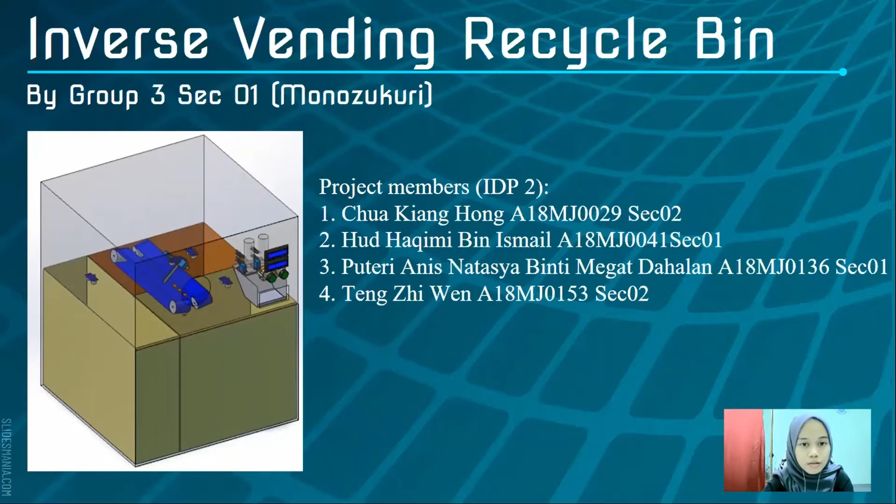We present our project, Inverse Vending Recycle Bin. First of all, our concept is a reverse vending machine. A reverse vending machine is a machine where people can return empty beverage containers like bottles and cans for recycling, deposit, refund or reward amount to the end user. This is what makes it a reverse vending machine. The user puts a product in and gets out the monetary value.

Our project only accepts the right type of materials. It prevents wrong use of recycle bins with the built-in waste segregation with recognition system. The machine accepts plastic bottles, aluminium tins and glass bottles from users. Next, our machine comes with a reward system where the users can earn money through recycling according to the amount of solid waste given by the user.

And lastly, we use a Blynk application to inform the person in charge when the operation of the product has problems, such as the recycle bins are full, or the coin machine is out of coins. This is what we call the self-monitoring system.

Now we go to the problem statement. The problems need to be solved in this project in order to increase the recycling rate of solid waste in Malaysia. We figured out the suitable technology, which is the recognition and segregation system, which we use to separate solid waste for ease of the recycling process.

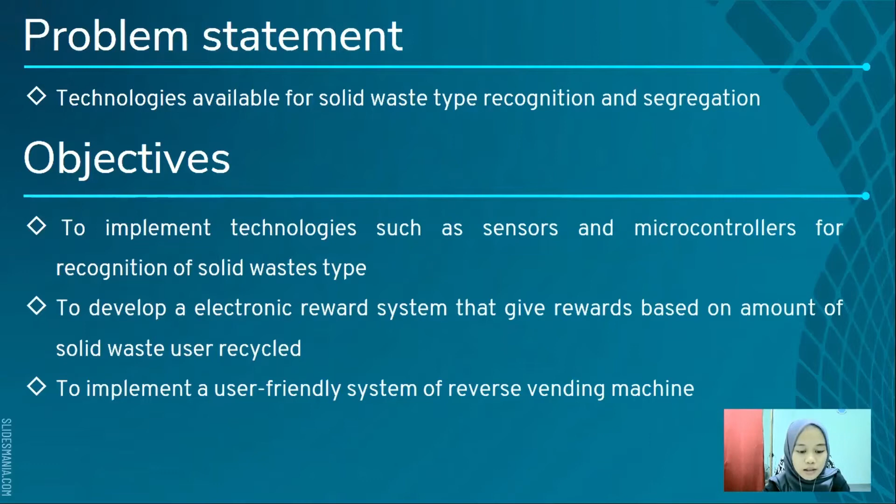The objective of our project is to implement technology such as sensors and a microcontroller in a reverse vending machine to recognize the type of solid waste and process them. Then the project is to develop an electronic reward system that gives rewards based on the amount of solid waste that the user has recycled. Lastly, to implement a user-friendly system of reverse vending machine.

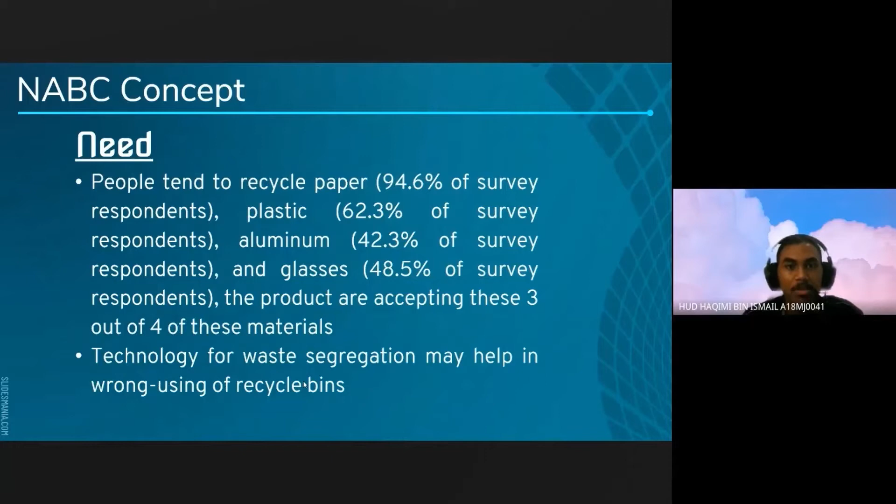For the approach, we apply technologies such as IoT and sensors to the recycling operation, utilizing the waste segregation system for plastic, glass, and metal, as well as a self-monitoring system in the inverse vending recycle bin. This will encourage people to recycle and give them money as a reward when they have completed the procedure.

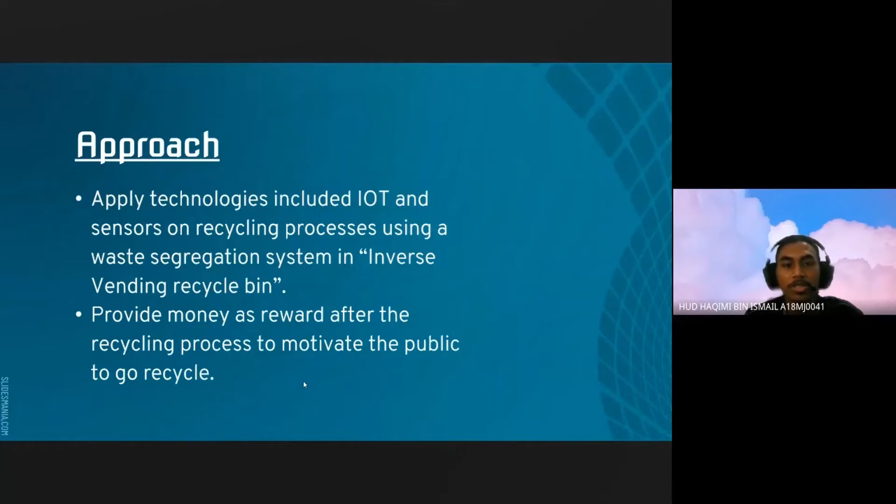Next, for the benefits, it gathers glass in addition to plastic bottles and aluminum cans, which some other products do not. Compared to other products that employ a receipt printing system, we are using coins as reward, which is more environmentally beneficial. When the recycle bins are full, the person in charge is notified, preventing overloaded recycle bins. The person in charge is also notified when the number of coins remaining in the machine has decreased, as a reminder to refill coins. This will ensure the machine continues to function properly. Because sorting and separating solid trash is done by machine, labor costs are reduced.

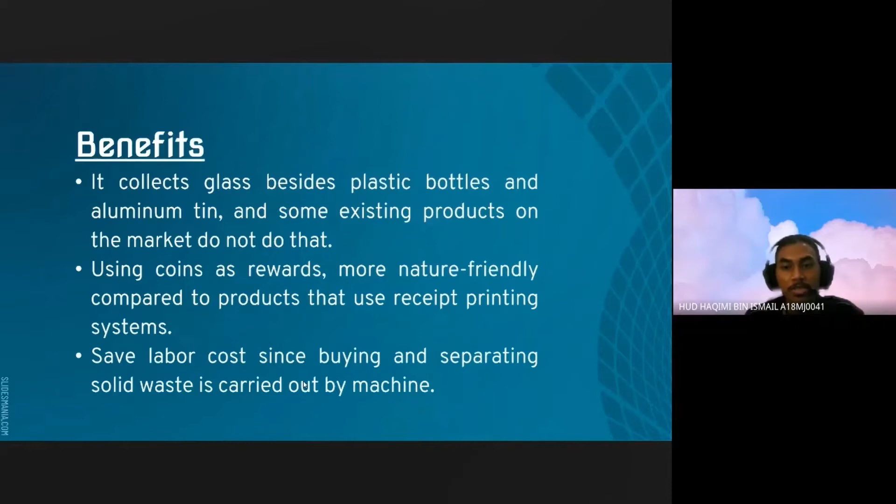For the competition part, currently there are many types of reverse vending machine products on the market. One of the available commercial products is Recycle n Save, based in Singapore. It collects plastic drink bottles and aluminum drink cans. The next available product is DRV1000. It's a reverse vending machine based in Japan that is designed to accept non-refillable PET plastic bottles and cans.

So our project has an advantage compared to Recycle n Save and DRV1000 because it collects glass bottles, which are not accepted by the commercial products. Besides that, the product uses coins as a reward for users instead of a receipt or coupon. It is more environmentally friendly compared to the commercial products. So thank you.

We have a coin dispenser system in the machine that dispenses coins to the user as the reward of recycling. On the machine, there will be two LCD screens. One will show the material detected by the system, and one will show the reward accumulated by the user in the system. And we have two buttons. One is the stop button that the user can use to check out the reward accumulated in the system after the recycling process. Another is a start button used to submit the material to the machine.

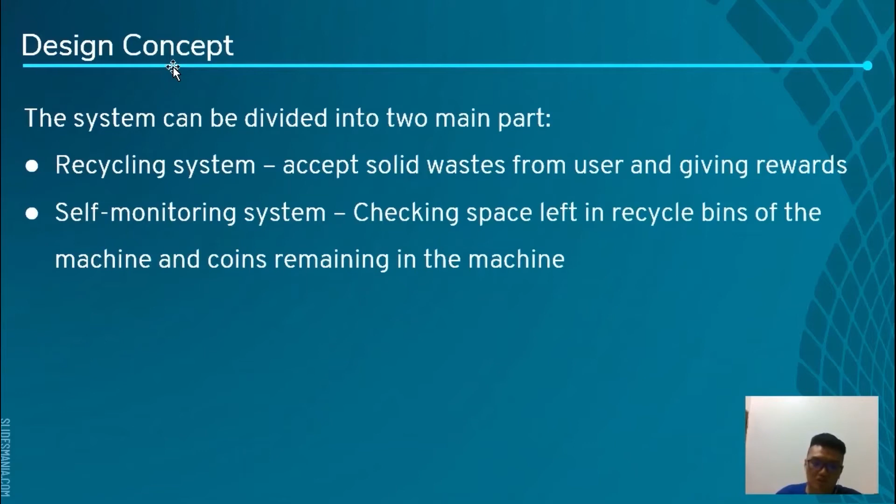The system of our project can be divided into two main parts. One is the recycling system that accepts solid waste from the user and gives rewards to the user. Another is the self-monitoring system that checks space in the recycle bin of the machine and coins remaining in the machine. First, we will talk about the recycling system.

The recycling system will detect the type of solid waste material inserted by the user into the machine based on the readings of the sensors in the system. After the user presses the start button, the solid waste will be sent into the respective recycle bin and rewards will be accumulated in the system. The user can accumulate more rewards by inserting more materials into the machine one by one and check out all the rewards accumulated by pressing the stop button.

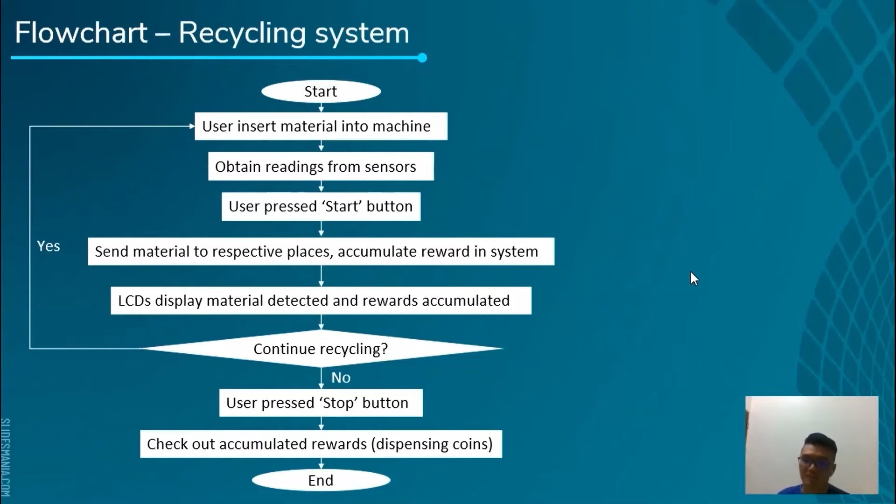For the recycling system, we are using an Arduino Mega board as the processor. There are infrared sensors, an inductive proximity sensor, and capacitive proximity sensors for solid waste recognition. The user can control the process using push buttons, and materials detected and rewards accumulated will be displayed on the LCD screens. Solid waste will be sent into the recycle bins by servo motors and a DC motor controlled by an L298N motor driver. Lastly, the reward will consist of 10 cent and 20 cent coins dispensed by servo motors.

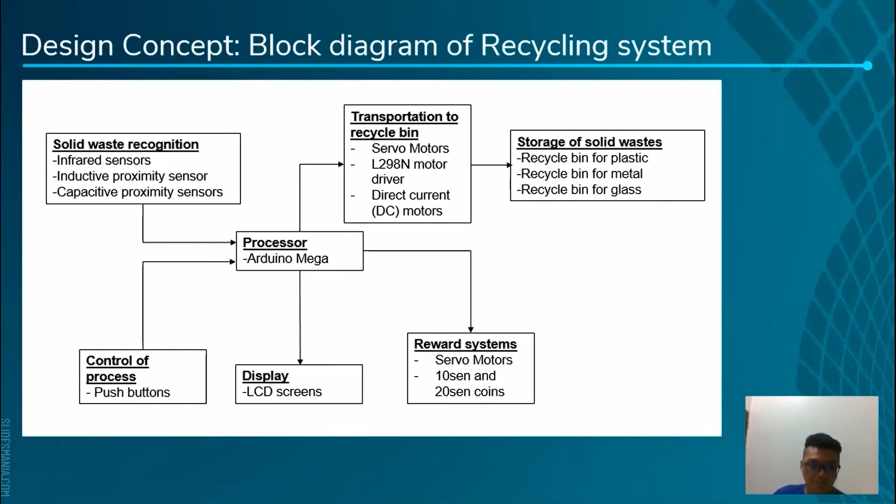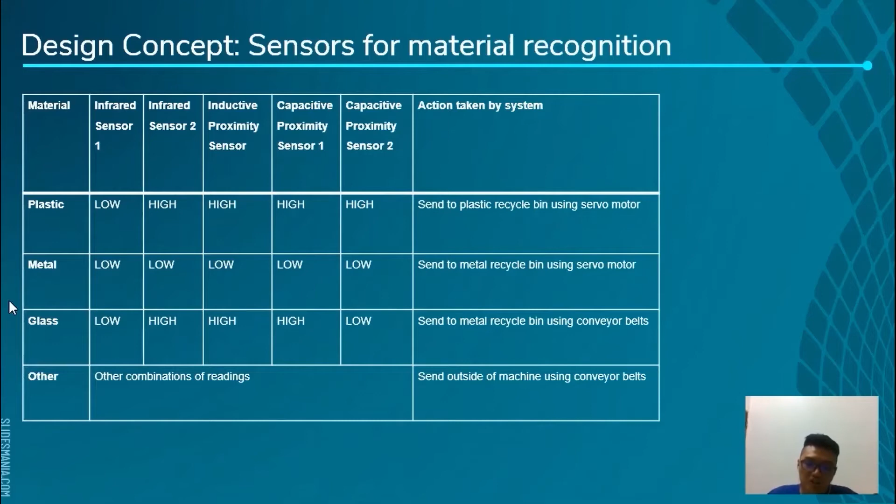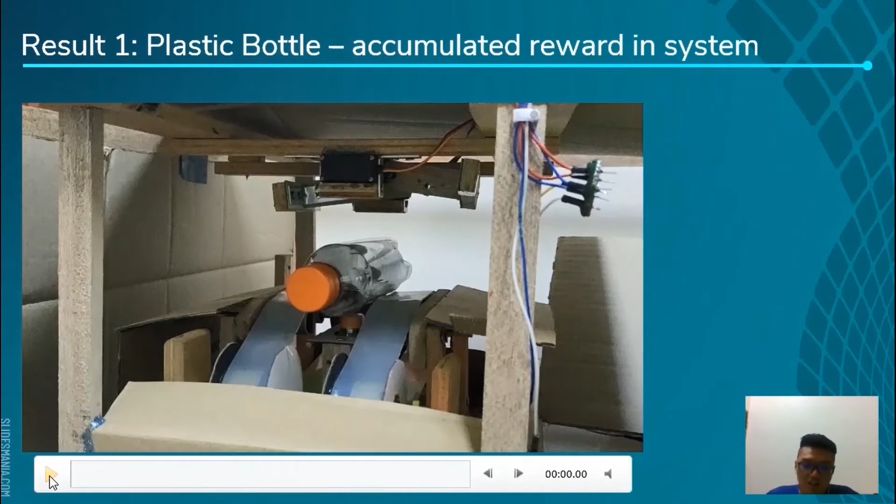Because of the limit of the video length, I will not explain the sensors for material recognition in detail. But for plastic, metal, and glass inserted into the machine, we do have unique sensor readings for them. Material that causes combinations of sensor readings other than plastic, metal, and glass will be rejected by the machine, as shown in this table. In our system, the reward for each plastic bottle recycled will be 0.7 cent. This value is for demo only and can be modified in the code.

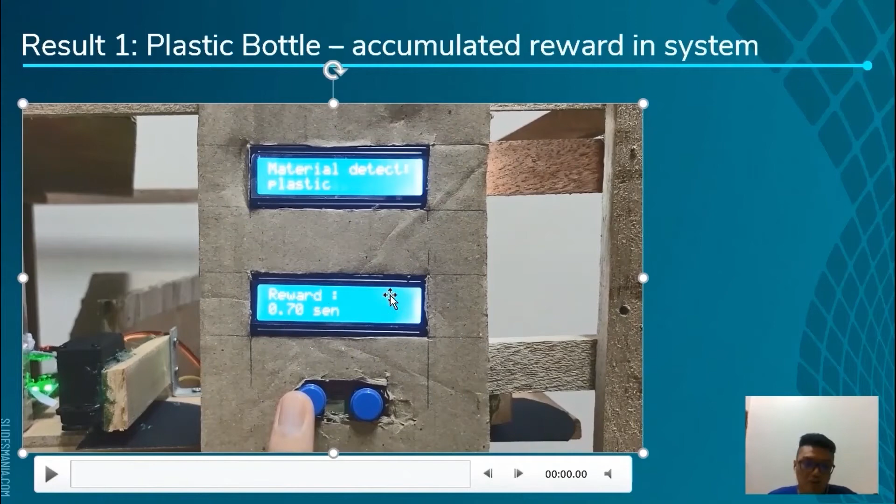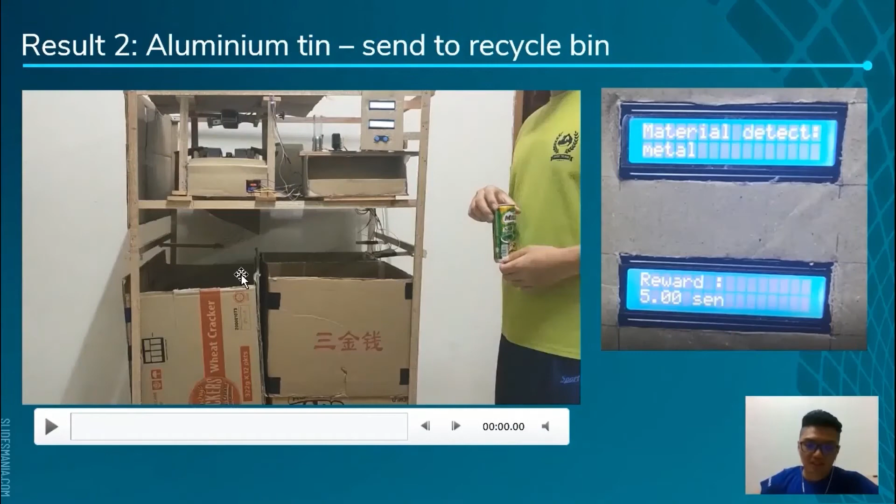This video will demonstrate a reward of 0.7 cent accumulated in the system after a plastic bottle is sent into the machine, as shown on the LCD below. And this video will demonstrate how a plastic bottle is sent into the recycle bin by a servo motor. This video will show how an aluminum tin is sent into the recycle bin, and after that, there will be 5 cents of reward accumulated in the system, as shown in the picture beside the video.

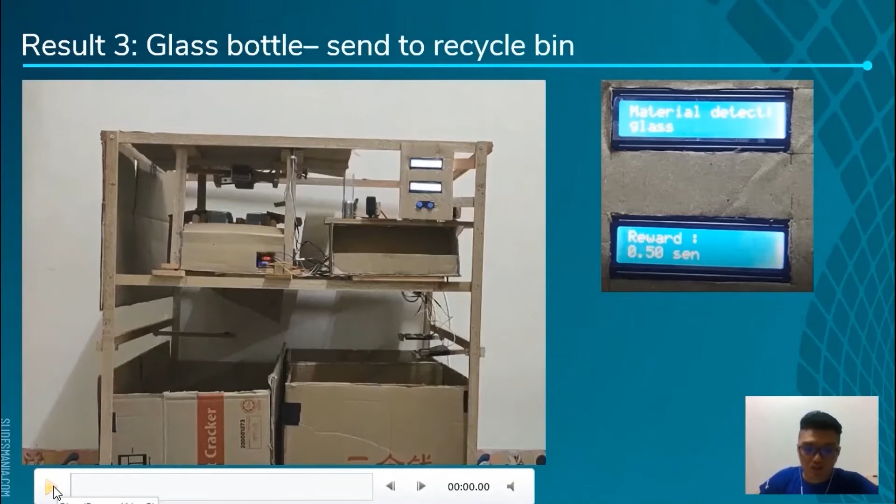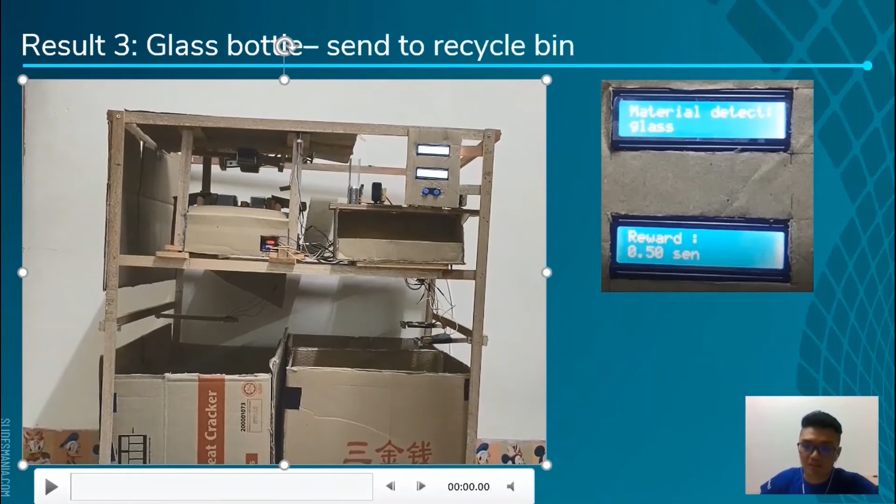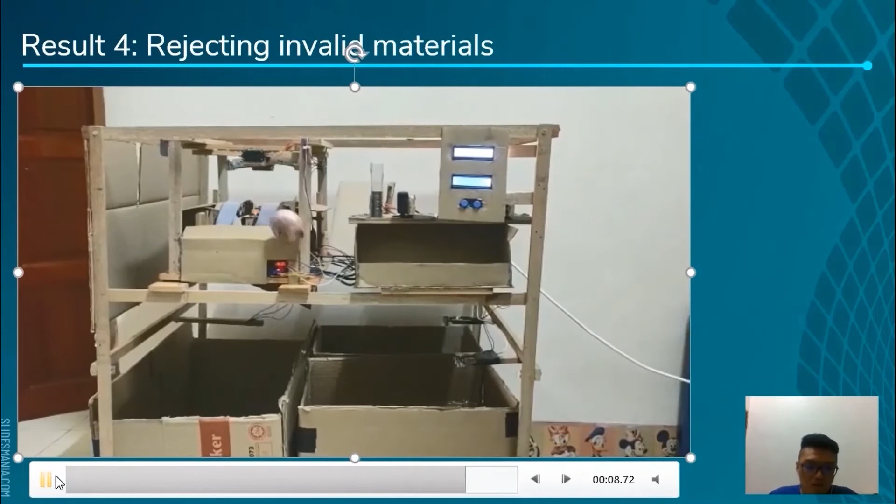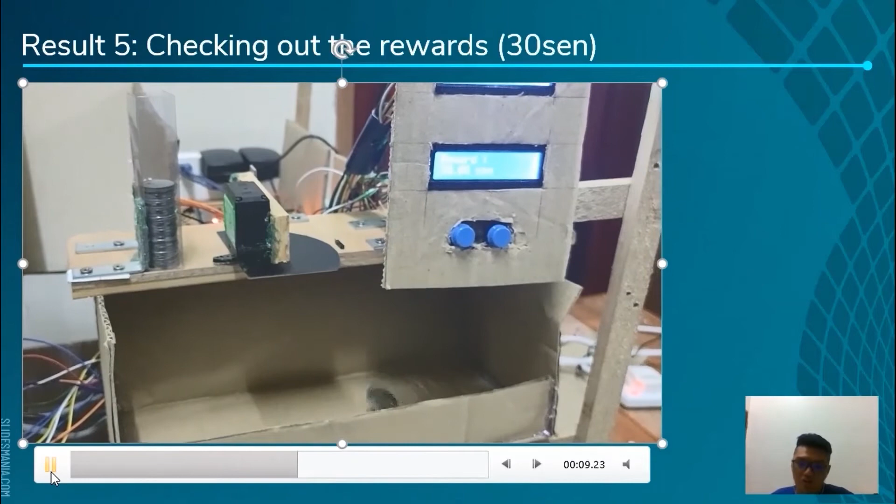This video will show how a glass bottle is sent to the recycle bin, and a reward of 0.5 cents will be accumulated after the glass bottle has been sent into the recycle bin. This video will show how the machine rejects an invalid material. We will take an onion as an example. This video will demonstrate how the user can get a reward of 30 cents after recycling the materials. 10 cent and 20 cent coins will be dispensed by the machine as the reward after the user presses the stop button. And that's all for the recycling system.

The next part is the self-monitoring system of our machine. The system will check whether the recycle bin in the machine is almost full or whether the 10 cent or 20 cent coins remaining in the machine have become low. If the coins are running low or there is not much space left in the recycle bin, a notification will be sent to the person in charge. If no action is taken, the system will stop operating when the recycle bins are full or no more coins remain in the machine.

For the self-monitoring system, same as before, we are using an Arduino Mega as the processor. For internet connection, we are using an ESP32 development board, and we are using the Blynk app to send notifications to the person in charge. For coin detection in the machine, we are using infrared sensors, and we are using ultrasonic sensors to detect the space left in the recycle bins.

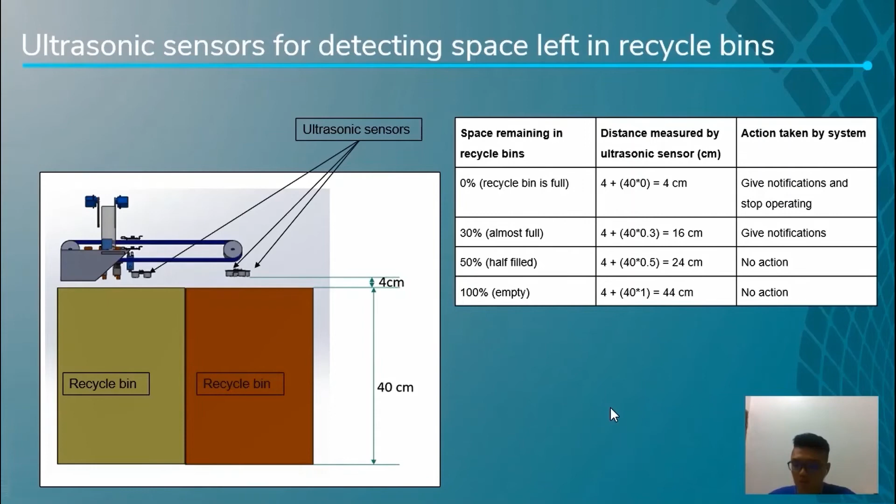So this video will show the notification sent to the person in charge when a plastic bottle is detected at a distance less than 16 cm from the ultrasonic sensor. We are assuming that the recycle bin is 70% full, so that the distance between the sensor and plastic bottle is less than 16 cm.

And now we will assume that the recycle bin is full, so the distance between the sensor and the plastic bottle is less than 4 cm. And a notification will be sent to the person in charge. The difference with the result just now is the machine will stop operating, as shown on the LCD screen here.

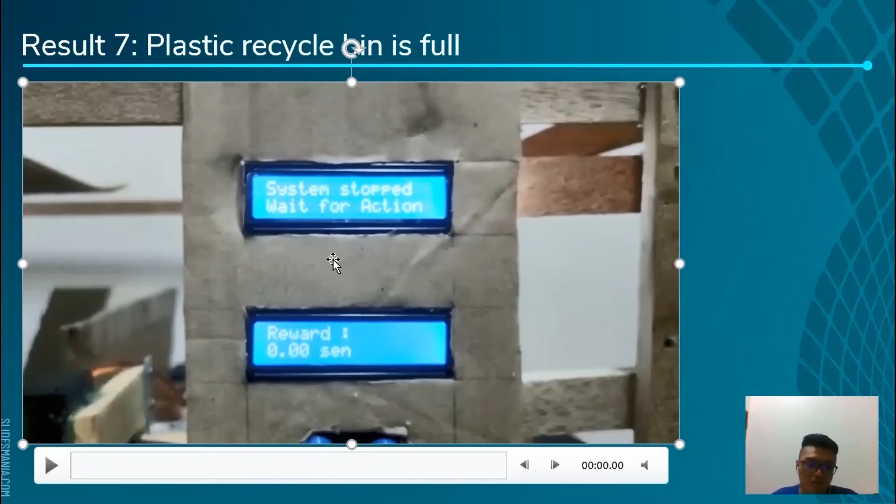And actually we do have recycle bins for aluminum tin and glass bottle, but for saving time I will just demonstrate the recycle bin for plastic bottle. The concept is the same for the other two recycle bins.

And next, in this project we are using a plastic cone to hold coins in the machine and an infrared sensor to detect the presence of the coins in the machine. To save time, I will just demonstrate for 10-cent coins in the machine, and the concept is actually the same for 20-cent coins. This video will show the notification sent to the person in charge when the 10-cent coins in the machine are considered almost finished, when the infrared sensor points to the middle of the cone.

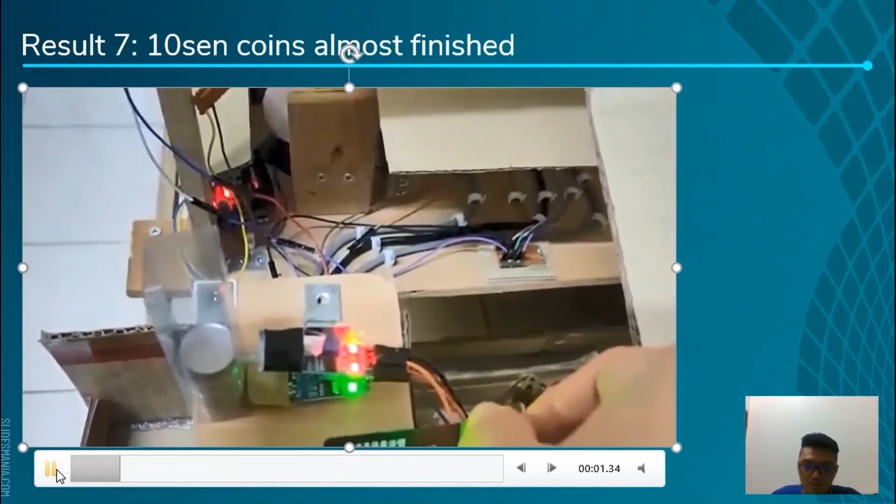The infrared sensor with red LED here cannot detect the presence of the coins. So I will manually discharge the coins in the machine to a lower level so that the infrared sensor cannot detect the coins, and a notification will be sent to the person in charge. Next, I will dispense the coins until it is very close to being finished.

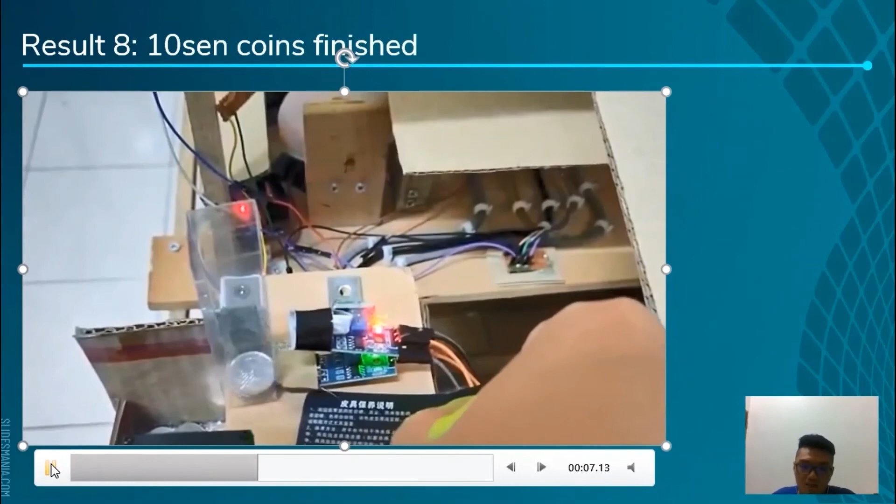And a notification will be sent to the person in charge, and the system will stop operating because the coins remaining in the system may not be enough to be rewards for users, so the system must stop operating.

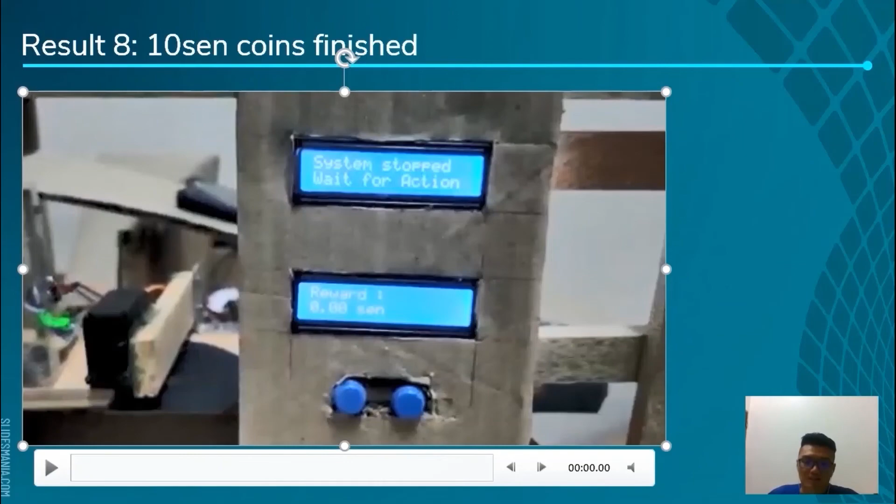Thank you, Chua. So now I'll be presenting sources of error. The first error will be that sensor readings for different types of materials are not 100% correct. For example, the infrared sensor that should not detect transparent materials such as plastic and glass may give some wrong output because the surface of the material is not smooth enough to have a lower reflection rate of infrared light.

So the second one will be that the ultrasonic sensor used to detect space left in the recycle bin is also not 100% correct. It may have some error due to the different angles of ultrasonic wave reflection by the solid waste, because the solid waste may have some random position in the recycle bins.

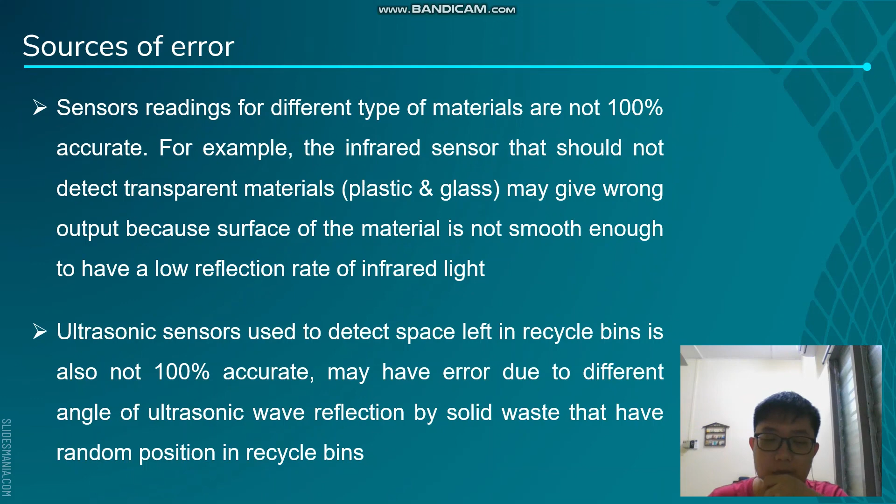So these errors can be solved by potential solutions. The first one will be solved by applying artificial intelligence technology such as a convolutional neural network (CNN), which has the image classification function, to have a better result of solid waste recognition. The second error can be solved by using more ultrasonic sensors to detect space left in the recycle bins.

So if the noise and measurement errors from the sensors are independent and have zero mean, then multiple sensors will improve the results, since errors tend to cancel each other out as the number of sensors increases.

So for the conclusion, our aims of this project have been achieved. The microcontroller, or Arduino, and sensors have been implemented, which is an IoT-based project. A user-friendly reward system that gives rewards based on the amount of solid waste the user recycled has also been developed. And as for our future scope, it includes applying more advanced sensors or AI technology for better accuracy of solid waste recognition and also a smarter system.